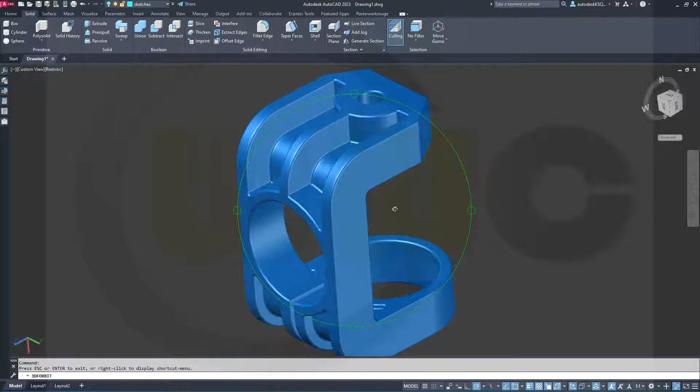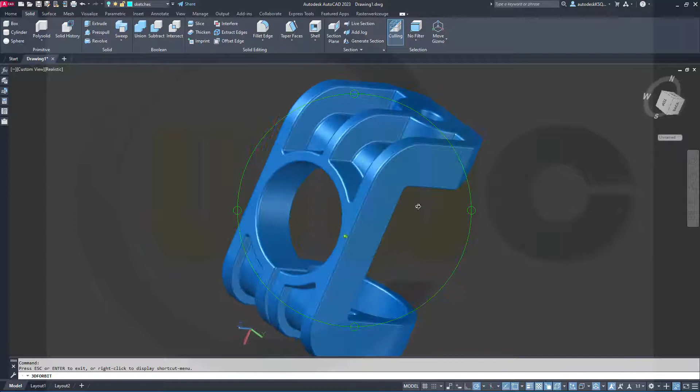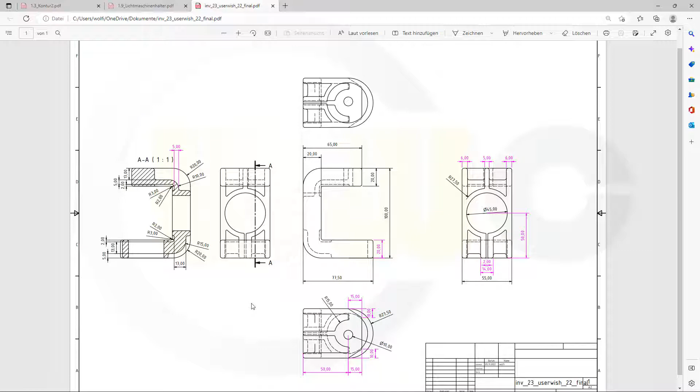Let's take a look at the drawing. You could make a screenshot of that drawing and follow the exercise step by step. So here is the drawing. As I've told you, you could make a screenshot and then follow this exercise step by step along my video. So let's have fun with AutoCAD.

Okay, let's go for the top plane, and I want to use some points, so it's easier to draw. Go for the points. One should be at 50:0. Another one should be at 0:50 up here, and another one should be at 50:100.

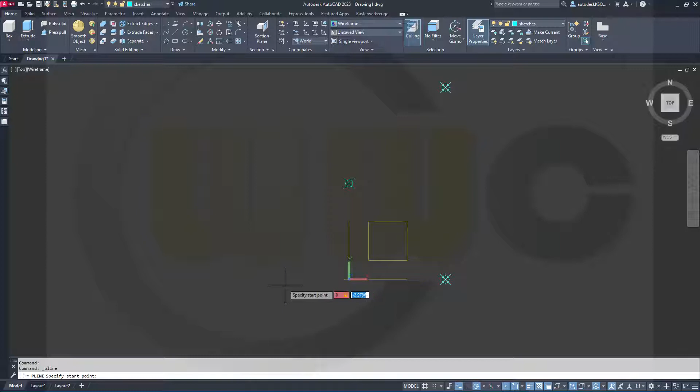Now I want to draw a polyline which should start at 0,0, and go up to this node here. So go for that one. Then it should go up 20, then back 30, then up 60, then over here, and that would be 45.

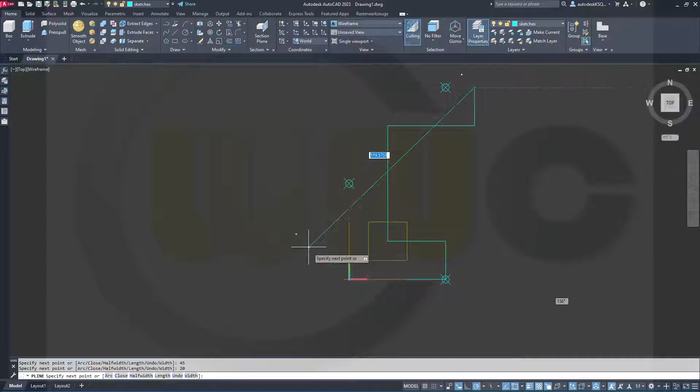Then it should go up. Let's try 20. Go over here and snap and close. So I've got a polyline, and now I can make an extrude.

So go for extrude, select that polyline, right click, enter, and make it. I want it to be symmetric somehow, so since it's 55 altogether, I have to go for 27.5 millimeter.

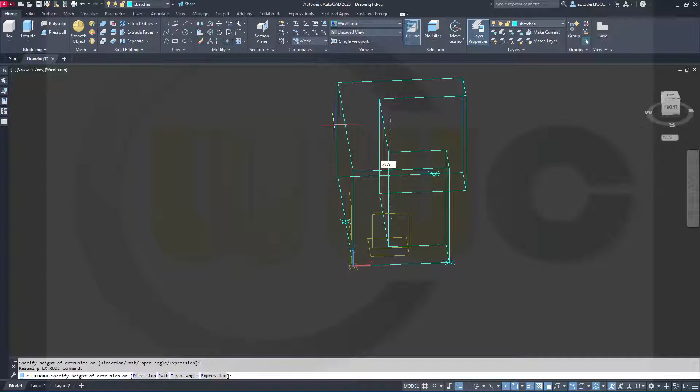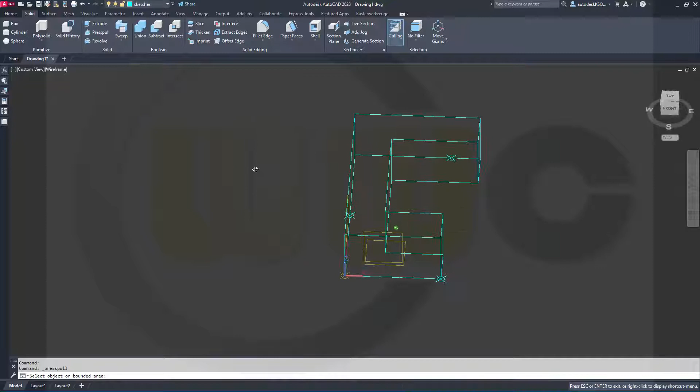And then I want to use the push pull command, or press pull command. I could also mirror it, but I want to use the press pull command, which is also here. Select, let's take a look at this surface and press pull in that direction.

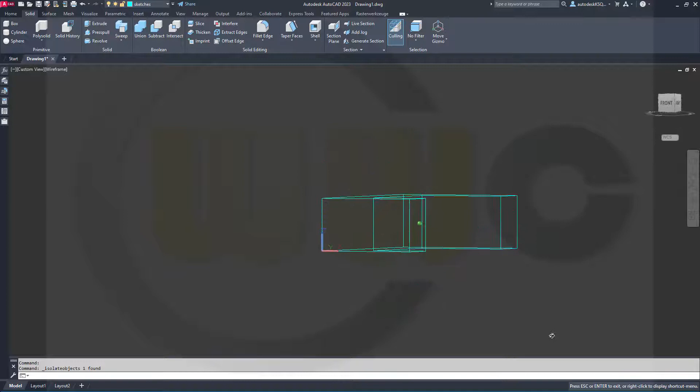But first I have to isolate that one here. So select it and go for isolate. Otherwise I will sort of press pull the wrong contour.

So now go for press pull. Select that face here in that direction, and that should be 27.5 as well, like this. Okay.

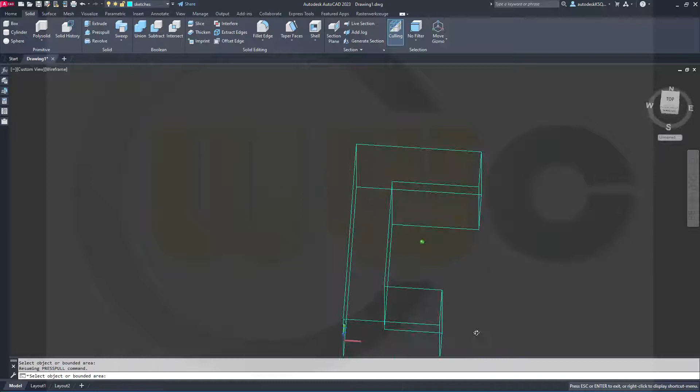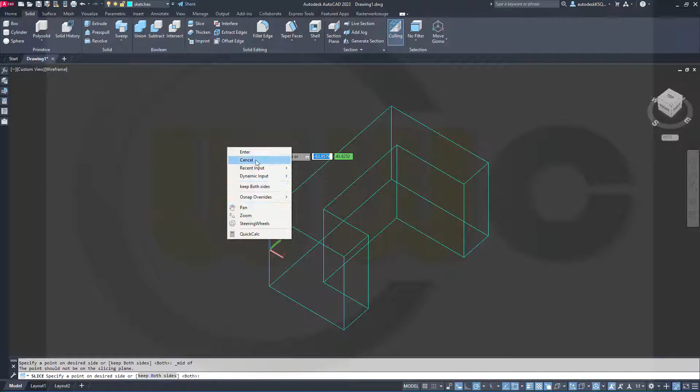So in order to proceed, I want to split that solid into two solids. So I go for slice. I select that here, right click, and I need the midpoint of that edge. Then I could go for the midpoint of this edge, and then the last, a third point, midpoint here, which defines a slicing plane. Now I want to keep both sides, so right click and go for both sides.

Here, keep both sides, which gives me two solids. Then I can isolate this one, and that one here, right click. Now maybe I can go for X-ray. I want to make a shell with 6 millimeter. So that's the solid.

I want to remove this face, yes, that face, yes, this one. Right click, enter, go for 6 millimeter, and okay.

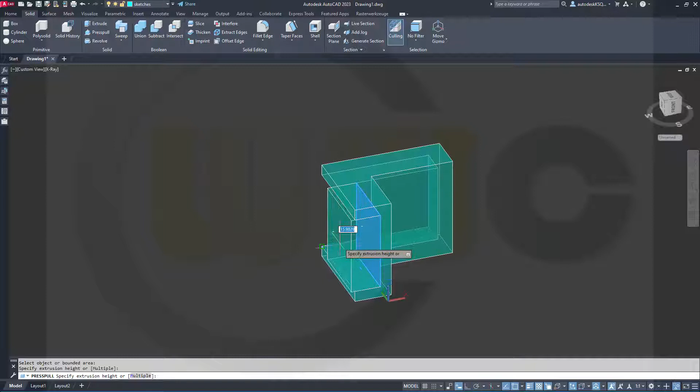Now that's 6 millimeter. It has to be altogether 7 millimeter, so I want to press pull those two sides by 1 millimeter. So go for press pull. Select this surface here, make it 1 millimeter in this direction, so it's 7. Same here in that direction, so again it's 7.

And this one here should go 9 millimeter. That's okay.

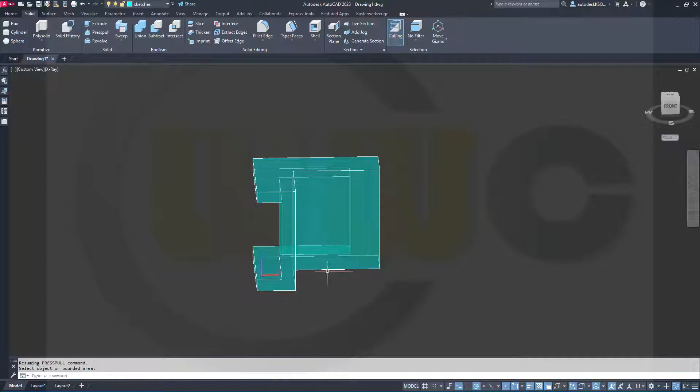Now I need another shell, again 6 millimeter, which will leave 6 minus 6 millimeter, and that will be 7 minus 6, that will be 1 millimeter, and then I have to press pull again. So go for press pull. No, not press pull, but another shell.

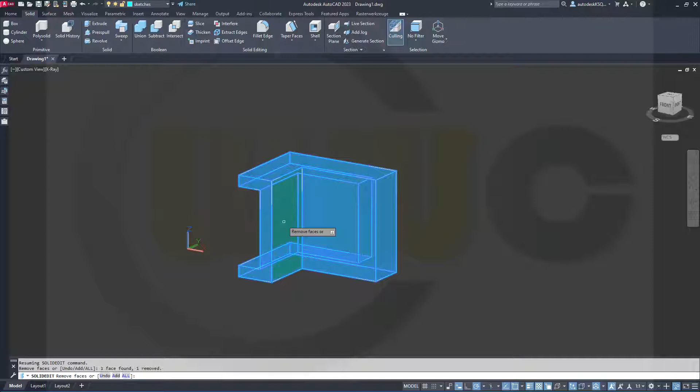So another shell with that object here, and I want to remove this surface here. That surface looks okay, and this one here. Enter, go for 6 millimeters and exit.

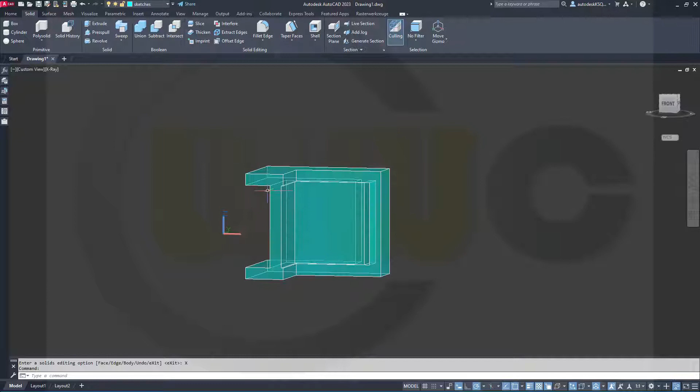So this should be 6 millimeter, so that's 1 millimeter here, and I need to press pull that in this direction, so I get 2 millimeter. So let's go for press pull this surface here, yes, but in that direction, and that needs to be 1 millimeter.

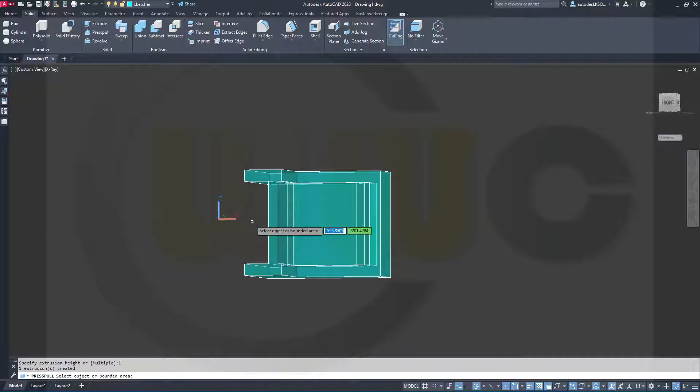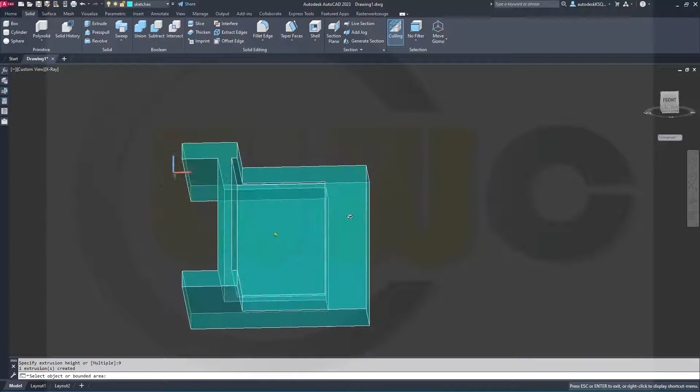Then select this surface here in this direction, again 1 millimeter, and now again this surface here has to go in this direction, again 9 millimeter. This looks pretty good, and escape that command.

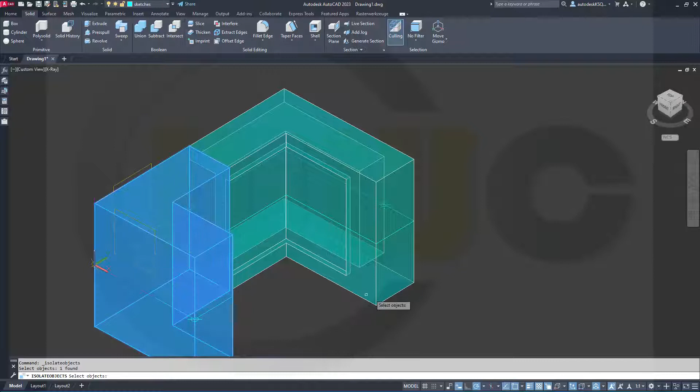Let's end that isolation and isolate this solid here. So isolate objects, I want to isolate this one here. That's solid, right click, and the other one is hidden. And now I have to use another shell command.

Okay, a shell. So this should be shelled. This surface or face should be removed, that one, this one, and of course that one here.

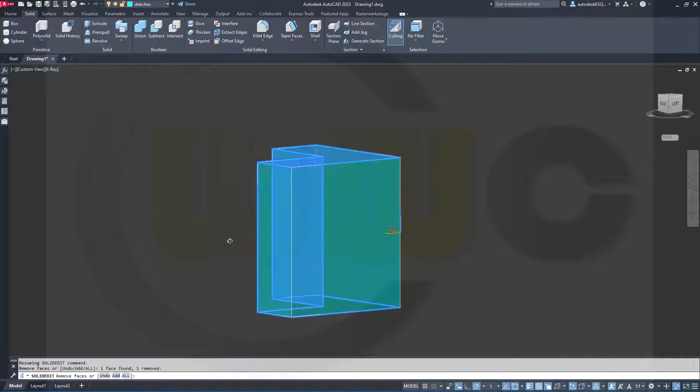Yeah, looks legit. So confirm and go for 6 millimeter. Enter, enter. Yeah, that looks okay.

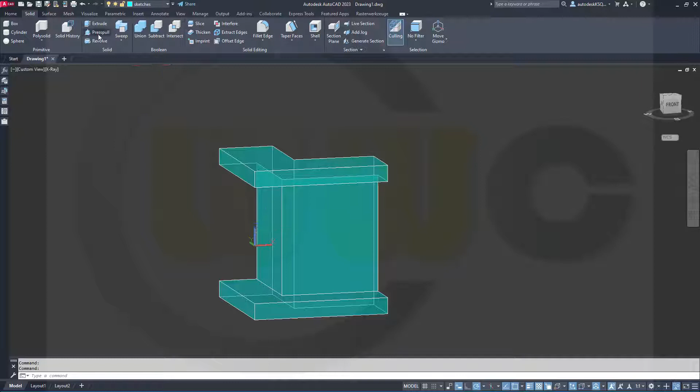Now I have to press pull. That's 6 millimeters, and it should go up to 15 millimeters, so I have to add 9 millimeters on those two faces. Go for press pull. Select this one here, 9 millimeter in this direction, and then select that one, again 9 millimeter in that direction.

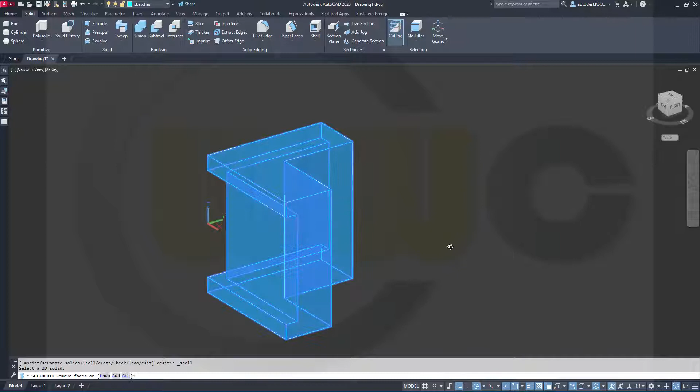Looks okay, enter. Now for another shell, that's the solid, and I want to remove this face here, that face, this one, and that one. Confirm, go for 6 millimeter, and enter, enter.

Now this here has to be 2 millimeters deep. So right now I'm sitting at 6 millimeters here. So from here to that it's 15, minus 2 will be 13, minus 6 will be 7.

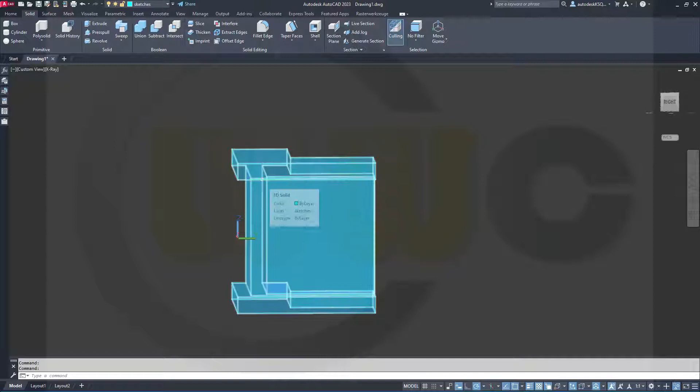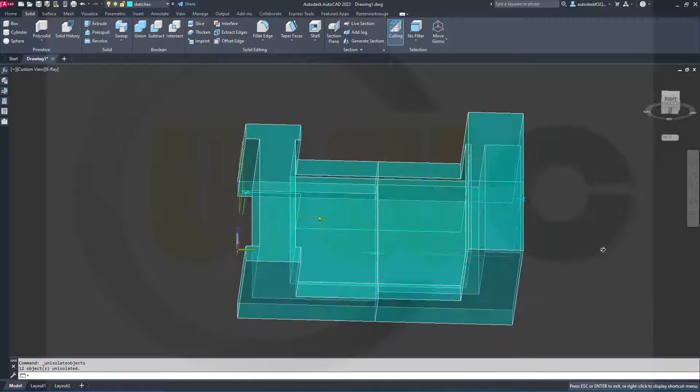So let's press pull this surface here in that direction by 7, then this one here in that direction by 7. Let's end that isolation and see if that looks okay. Yeah, this looks okay.

And now I can unite those two solids. So go for a union, select this one, select that one, and enter. Great.

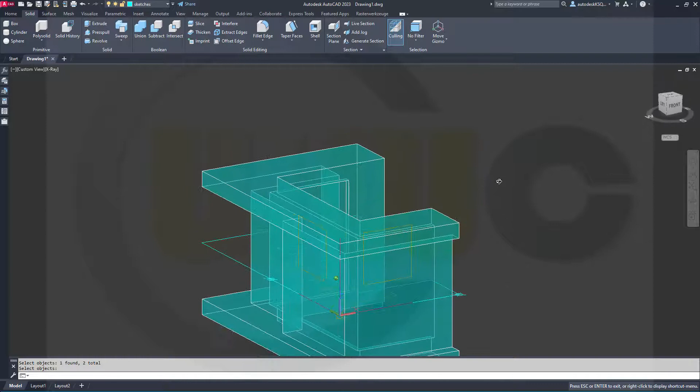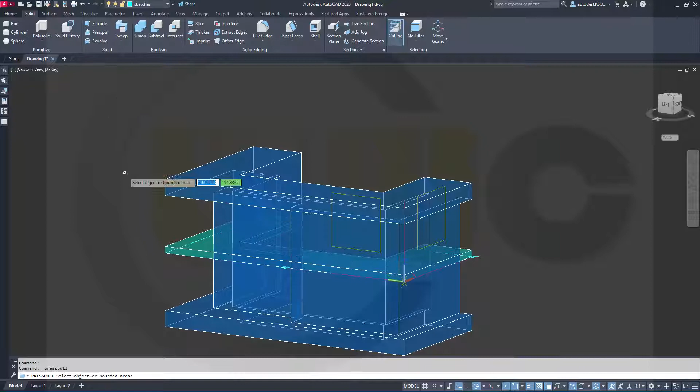Next I will need cylinders, or yes, I can go for the cylinders. I could of course make first another extrude with this one, 2.5 in that direction, presspull 2.5 in this direction. Maybe put that solid onto a decent layer, maybe on that solid plus layer. Now I want to add another extrude, so go for an extrude, select that polyline here, right click, enter and make it in this direction 2.5. Then go for the presspull, select this surface here, that one, in this direction 2.5, which gives me an overall thickness of 5 mm, and escape.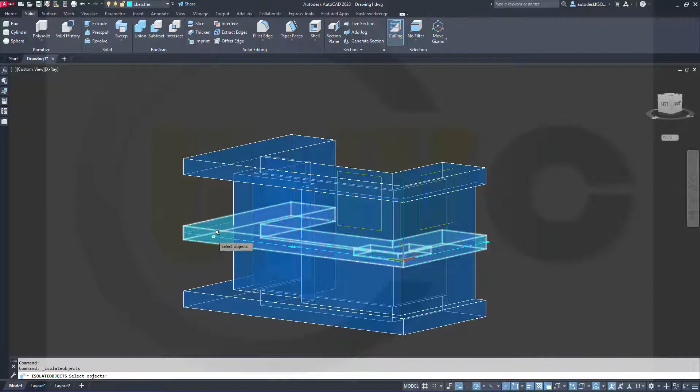And I will need sort of a similar profile like this. So let's go for an isolate, just that polyline, right click. So let's go for a polyline. I can draw a new polyline, or I just could trim it. Let's see, so let's go for the midpoint here to the midpoint over there. That would be this one here. And now I could trim.

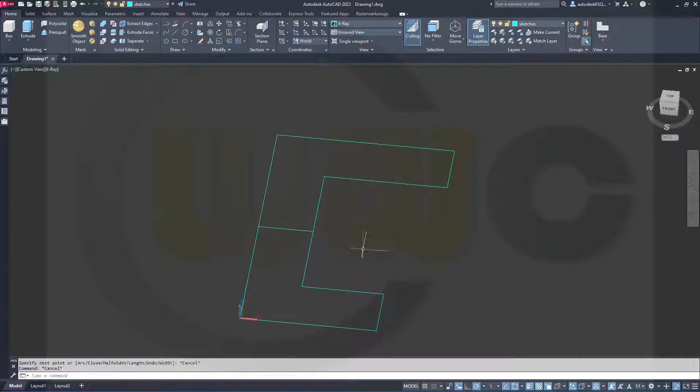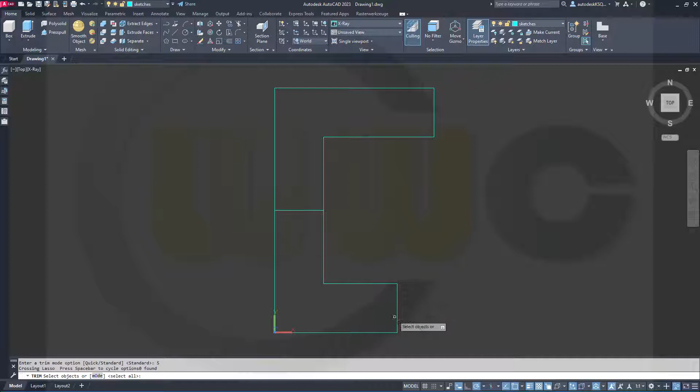Let's take a look from the top. And the quick trim might not work, so you have to go maybe for, see, doesn't work. So you have to go for the right click mode standard. It's already on standard, that's interesting. So select first the objects you want to use for trimming, right click, and now I should be able to remove these here. Okay, and I can of course erase those, right click, and that's okay. Enter. This should be a polyline, so let's just join it. Join, enter those two, enter, and this will be a polyline.

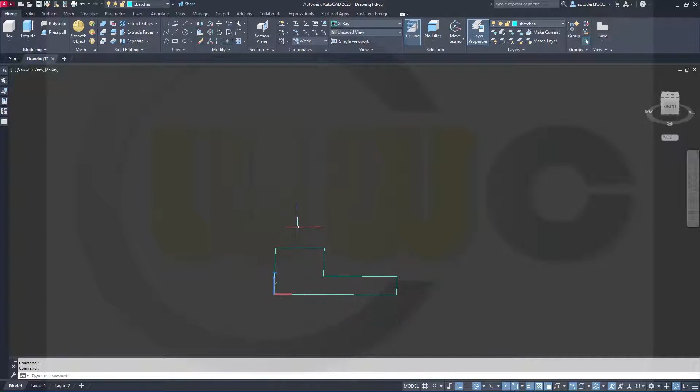And I want to make another extrude, and this should be 7 in this direction and press pull in the other direction. So go for an extrude, make this here the first solid, 7 mm, then go for the press pull, select this face in this direction, again 7 mm, which gives me 14 mm thickness altogether. And let's end that isolation.

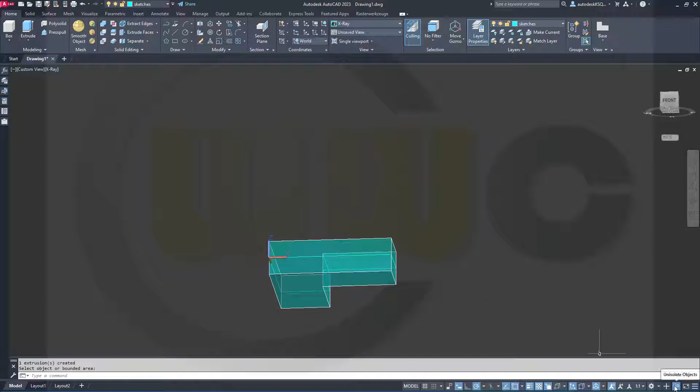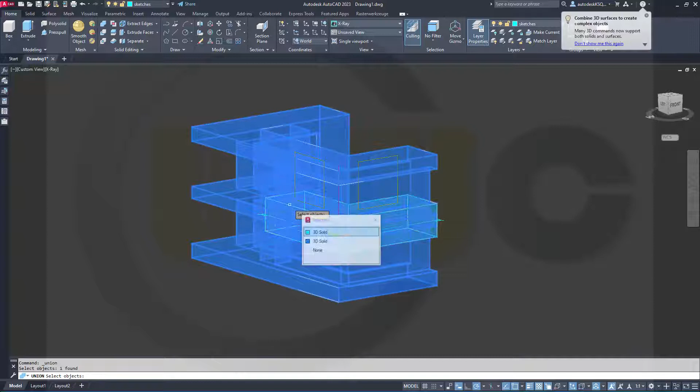Yes, that looks okay. And now I could again go for a union. So go for a union, select this as the touch, and then that would be the tool, right click. Okay. Didn't work. Why? No, let's try once more. This one and that one. I should have taken all of them, right click. Now it's okay.

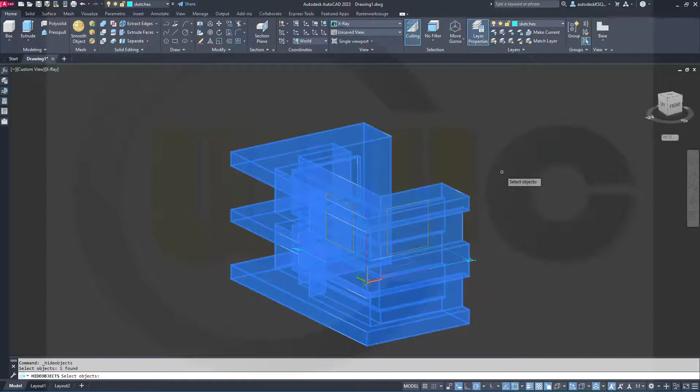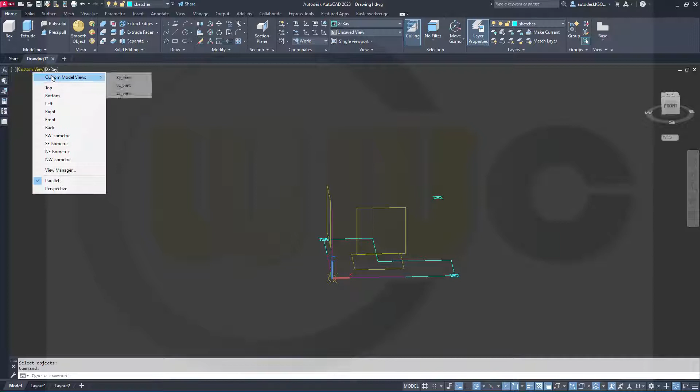Next I will need cylinders. So I want to hide that solid, so go here, go for hide objects. I want to hide that solid here, right click, and now go for the cylinders. And therefore I have to rotate my axis system. One would be on the YZ plane, and 2 would be sort of that XZ direction. So hopefully I've done here. Yeah, I've done. So I want to go for the ZX view.

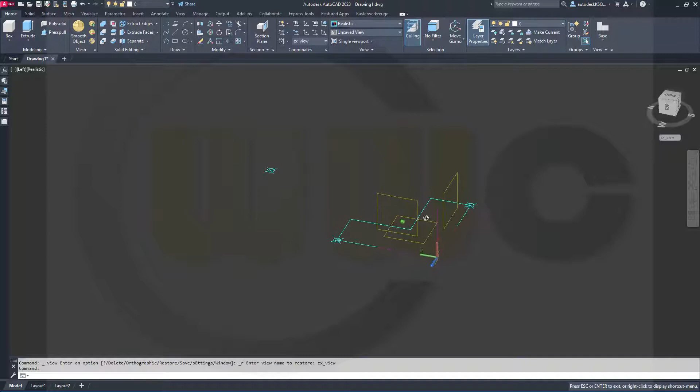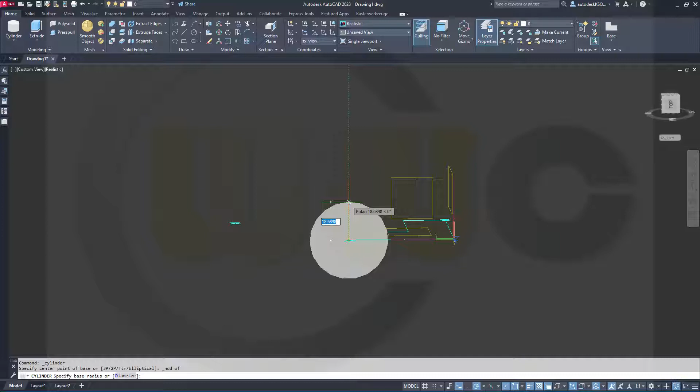Is that correct? It's perspective. I want it to be parallel. Does this look okay? So that would be this direction. So I could go for cylinder and select that node here, that node here, and the diameter or the radius should be, diameter is 55, so it's 27.5. Enter, and of course it should go in that direction, 20 millimeters, like that.

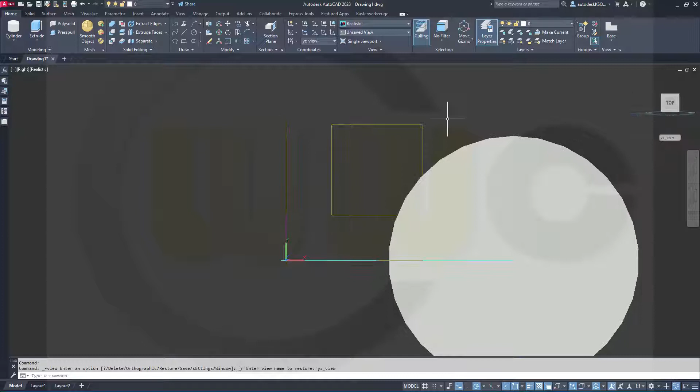Then I need to rotate. Let's go for the YC view. Is that okay? No, something's wrong with my template. Let's go here, make it parallel. I have to redo that, and that's not correct. I want it to be in this direction. So let's rotate it, just rotate it, select it, go for that rotation around the y-axis. 90 degrees is default, so just confirm.

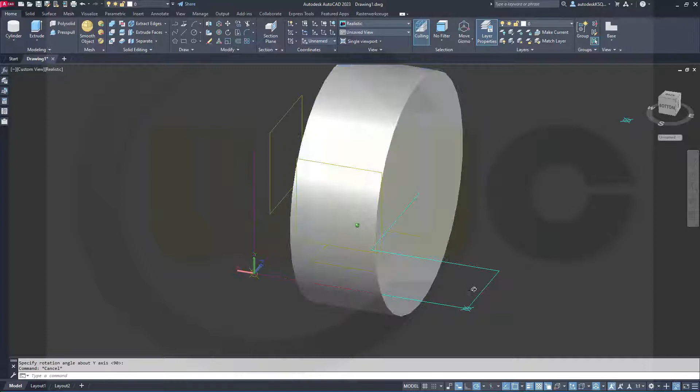And then I can do another cylinder right on this point. So go for cylinder, control right click, go for the node, select that node, and again it should be 27.5 in radius, and the distance should be 20.

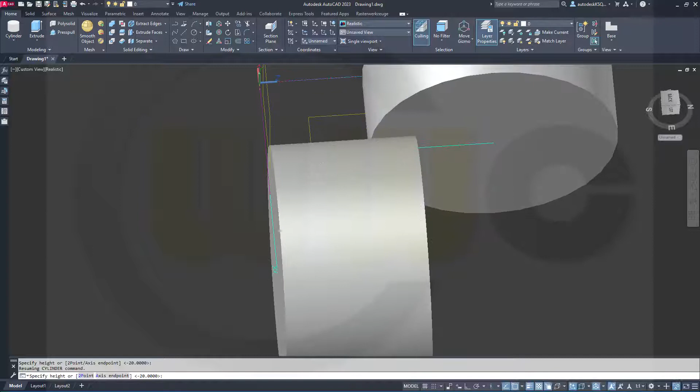Let's bring back the solid. Yeah, looks good. And I can do another one at the top here at that node. So go for another cylinder, select that node up here, that node here, this one.

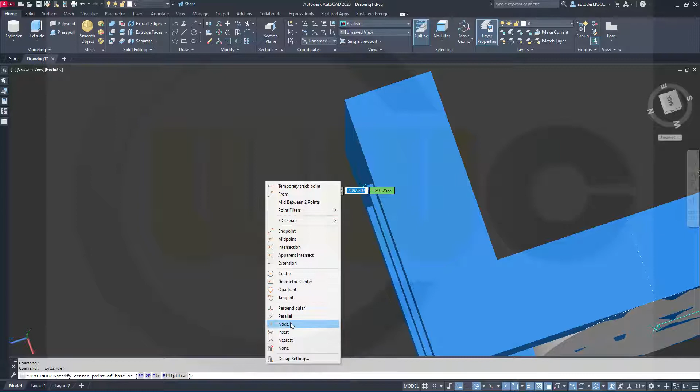And here the radius would be 15. And in that direction it should go for 20 millimeters. Yes, that looks okay.

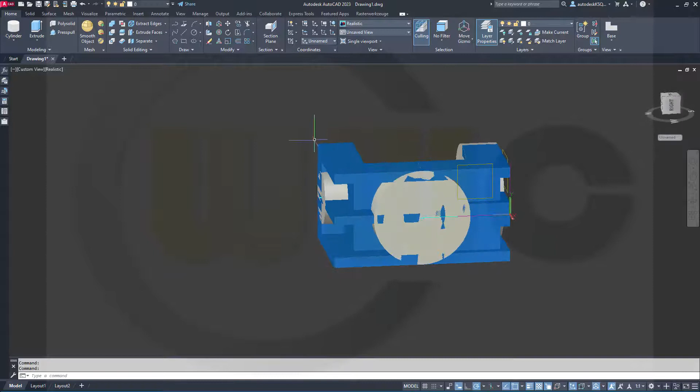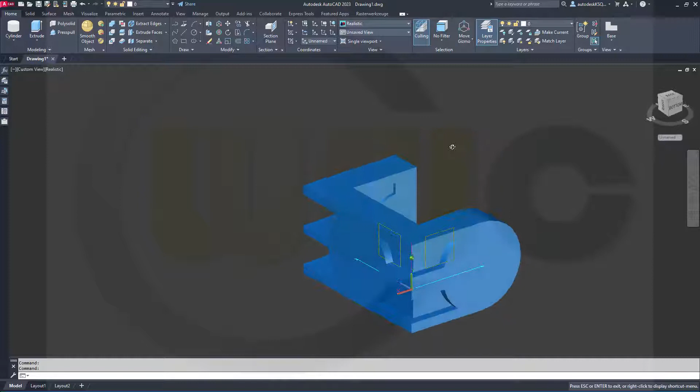Let's make a union. So that's first part, second solid, third solid, and the fourth one. This one, right click, and this really looks nice. Yeah.

Now I could go for the holes and then for the fillets, but rounds, let's make some of those rounds first. Okay, let's switch to solid and go for fillet edge. And the first radius I want to do is 10 millimeter.

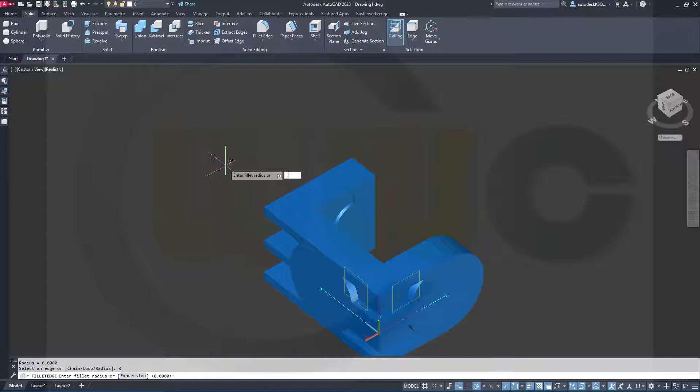And that would be on this edge here, this one and that one. Enter, preview, repeat. Next one would be

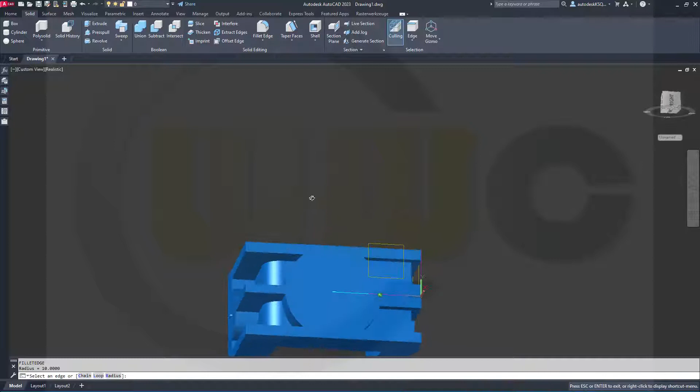15. So go for a radius of 15. On this edge here and that edge. Enter, enter.

Next, I want to go for 20 millimeter. So repeat that command. Go for a radius of 20. And select this one here.

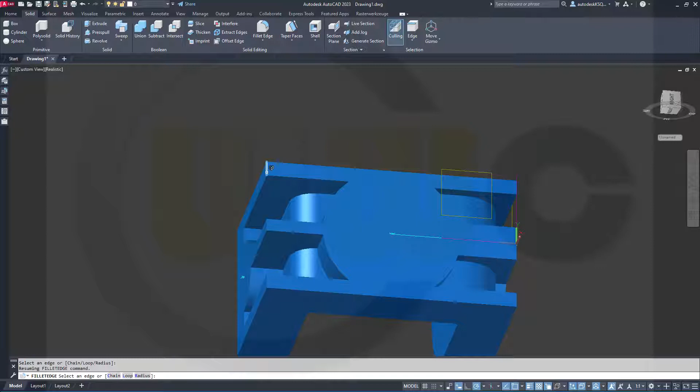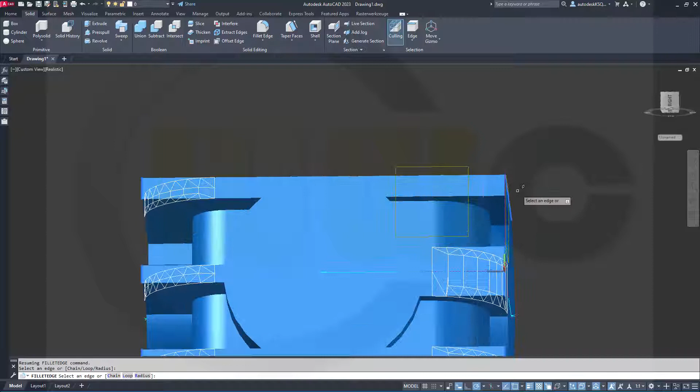That one. This one. That one. This one. And that, no, this one. Enter, enter. Looks great.

Now I could go for the holes. Yes, let's go for the holes. And I want to use cylinders for those holes. So this one is already there, so let's go for another cylinder

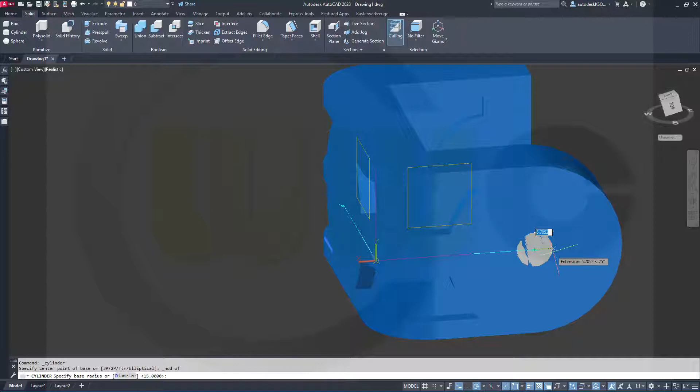and snap onto the node, this node here. Okay, and in this case that radius should be 22.5, and you could make it 20 or even a little bit more, so it's easier to select. Maybe 25.

Then another one at this node, so with another cylinder. Again, select the node here. Radius in this case should be 5, and the length again make it maybe 25, so it's easier to see and to select.

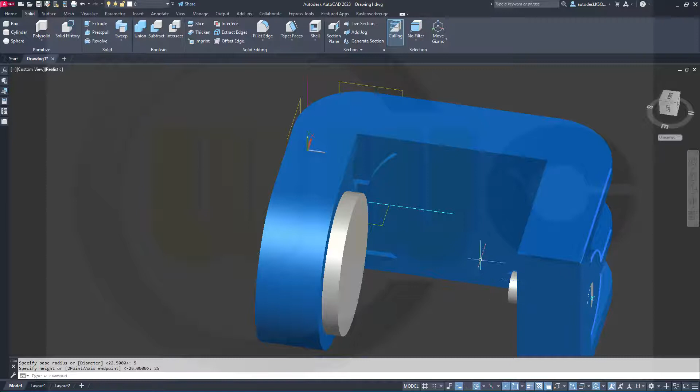And then I need another one here, so I have to rotate that axis system again around the y-axis here by 90 degrees. That should do.

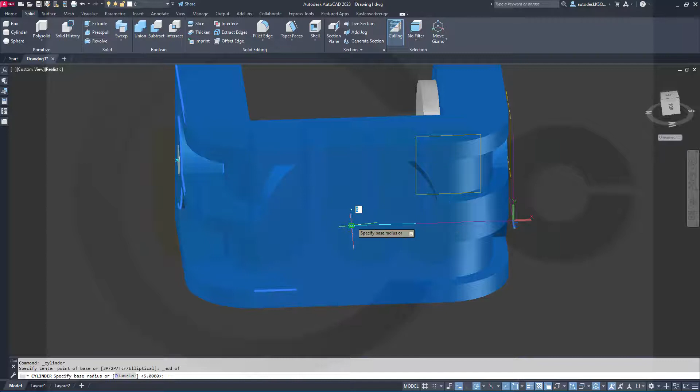Let's go for another cylinder. Select again that node here, and that one would be 22.5, and again in that direction maybe 25.

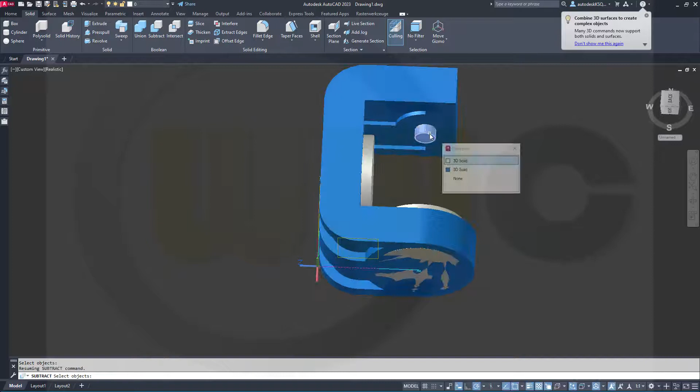Now I can make a subtraction, so that's the target here, this one. Right click, and I want to remove this one, that one, and this one, of course, and enter.

Nice. Again, I will need chamfers up there, here, and those chamfers should be 15 by 10. Yeah.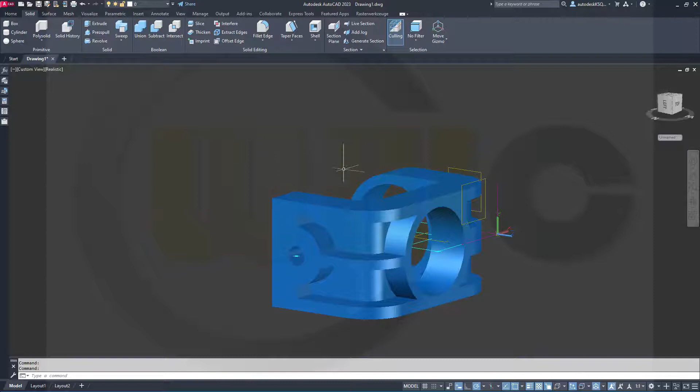Okay, so let's go for the chamfers. And it's hard to tell which distance is which one, so there's a 50-50 chance that I do it right the first time. So let's select that one here, go for a distance, and the first distance might be 10.

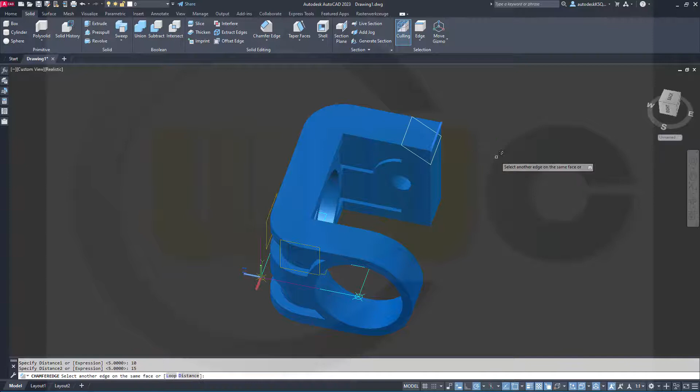That looks okay, and then the second one could be 15. Let's see. Yeah, this looks okay, and confirm this. Yes.

Now on the other side, I think maybe it's the other way around this time. So select this one, go for a distance, make it 15 first. Let's see. No, it's again the other way around.

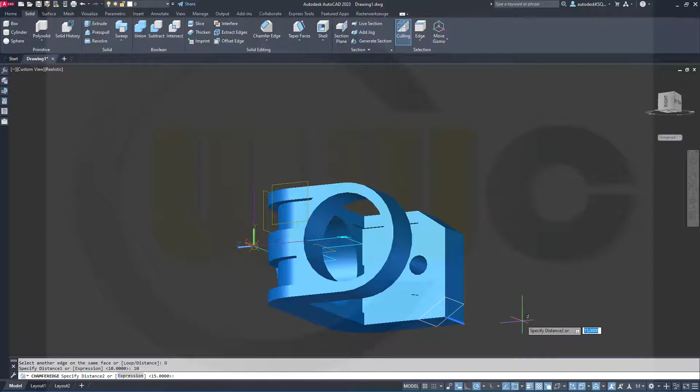So let's undo that. Go for chamfer edge, select this one here, go for a distance of 10. Did it work? And then for a distance of 15. So looks legit. Great.

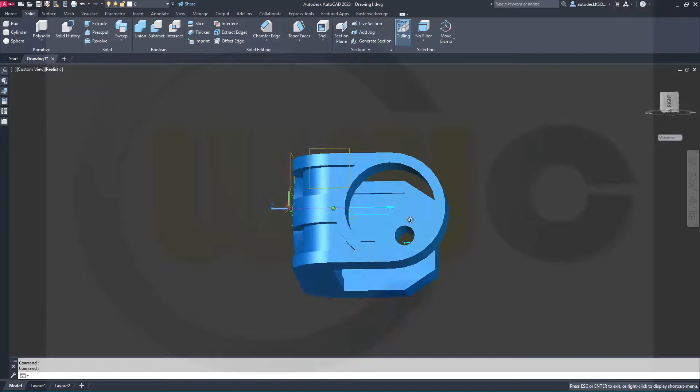Now the rest are just fillets or rounds, and I will leave that up to you. Those fillets are between 0.5 millimeter and 2 or 3 millimeter, and I will start the recording after I've done all those fillets. And of course I've missed something.

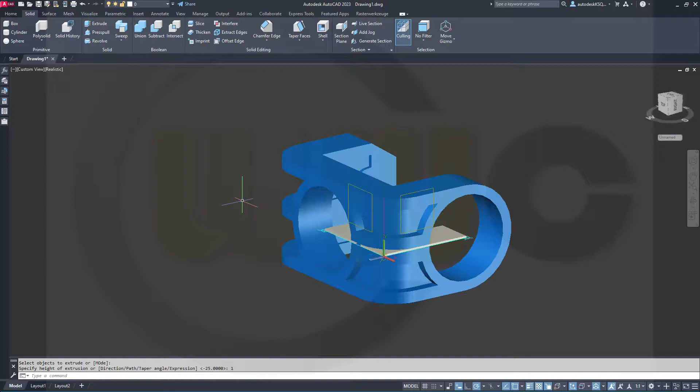I have to make an extrude and subtract that here because there's a gap here. So let's go for another extrude. Select this polyline here. Okay, right click, enter, make it 1 millimeter in this direction, and then press pull and make it 1 millimeter in this direction.

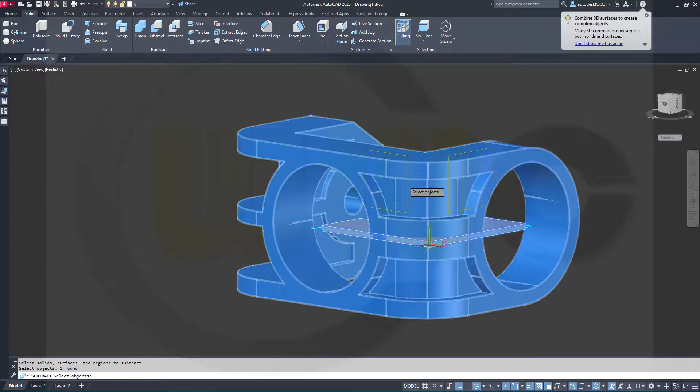Okay, and I want to subtract this from my solid, so go for subtract. That's the target, right click, and that's the tool, right click, and that's okay. I could hide the sketches layer.

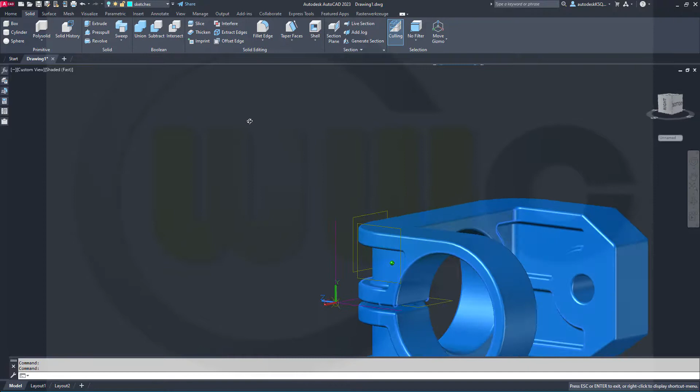Yeah, and now I can go for those fillets, and I will start recording after I've done all those fillets. Okay, so I've done all those fillets and I'm done. So I hope it was helpful.